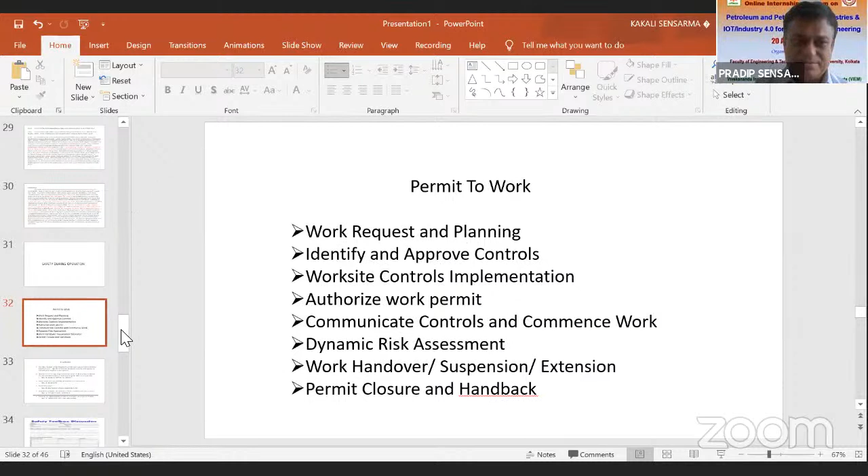Yes, sir. Okay, today's subject, as we said, is HSE in oil and gas. HSE means health, safety, environment in oil and gas.

Before you jump into this health, safety, environment in oil and gas, let me tell you something. This HSE is not a subject by itself. Everything in HSE basically stems out from common sense, backed by your technical knowledge or any knowledge. Common sense backed by knowledge, and you can be an HSE master. You have to apply your common sense, and it can be backed by your technical knowledge. Knowledge is also very important. So it's nothing but common sense.

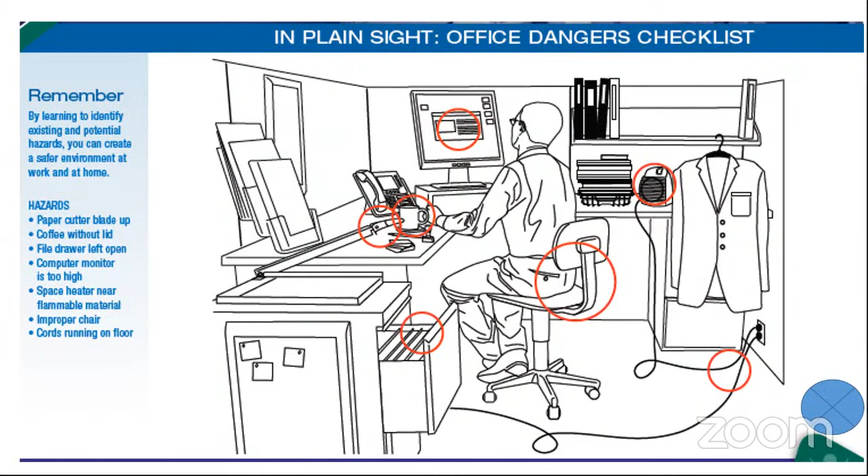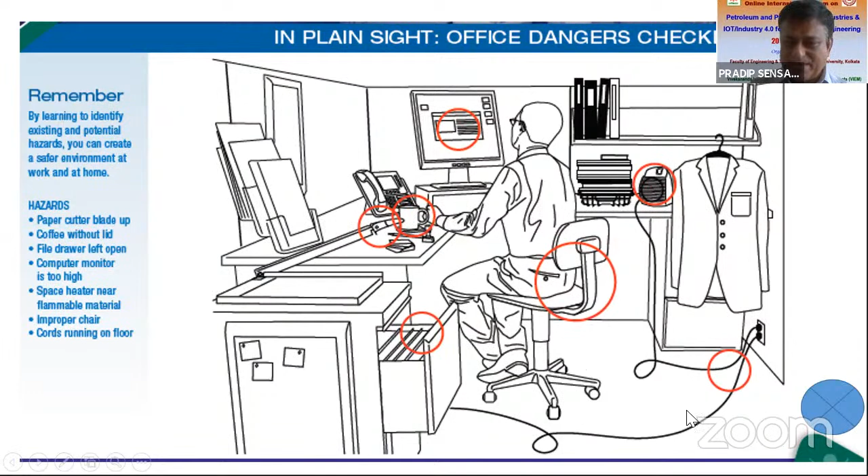Yes sir, if it is hung improperly, then it will be risky. Yeah, if you put your hands - that's why they are put outside your reach. But even if you do not put your hand, there may be some problems coming out of the fans. Just a short video I can show you.

Can you see? Yes, sir.

Providential escape, isn't it? Yes sir. So these fans can come out of it, okay?

And by the way, whatever I'm showing you, it's all available in the open, YouTube or anywhere. You can go, you'll find all these things. And if you look for these fan accidents, there is not one, there are many. These kinds of things can happen with ceiling fans, okay? So there are so many things that go into the design and the installation of the fan also.

So the design of the fan should be such that it can take its load. And during installation also, you have to take care of so many things. A very simple miss, maybe that lock nut - there is a pin there, and that is a very common miss sometimes. They don't put the pin correctly, just put it and don't bend it. So this can create this kind of incidents and accidents. So even if you're at home, you should take care of these things - that whenever you are installing the fans or somebody else is installing the fan, you must take care that they're installing it properly so that this kind of accidents cannot happen.

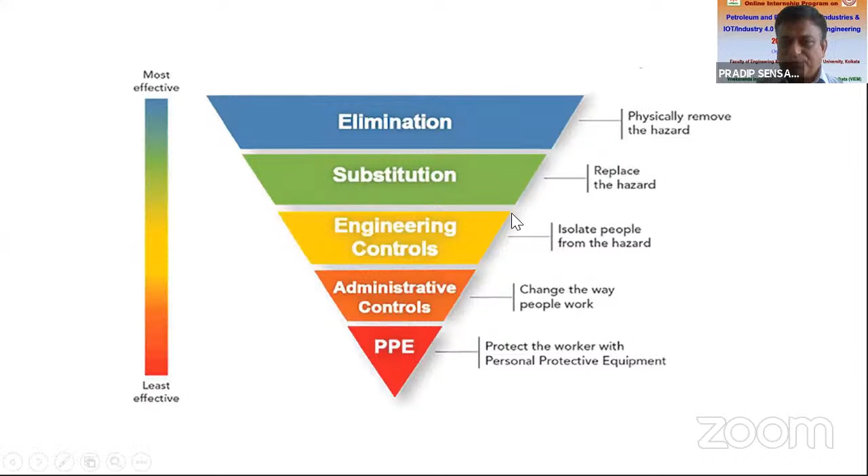Now what I'll do is go through a small part of an oil and gas plant and show how we design it and put safety into it. When you talk about safety, there are two major categories: process safety, which is within the process plants where you take care of process elements in a safe way, and personal safety, or occupational hazards safety.

So when you talk about process safety, first this during the design stage, okay? This is a small plant. I will just explain how we take care about the process safety, which most of the process engineers will have to take care of.

When we talk about safety, sometimes we tend to think that maybe some safety engineer will come and take care of this. I'm telling you, they will not do anything. It is you - most of you are chemical engineers by profession, so probably some of you will be coming into process engineering, and safety is your cup of tea, not the safety engineers'. Safety engineers will always be in advisory roles.

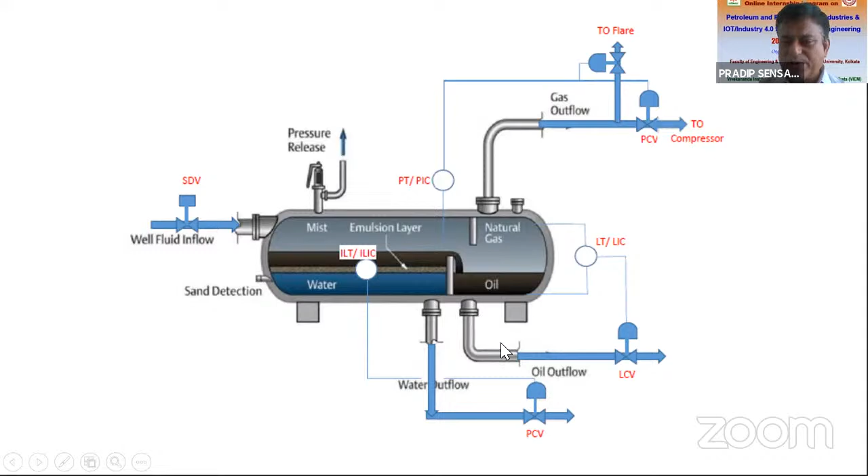Similarly, if the oil level keeps on increasing. Before that, let me check: say the oil level control valve (LCV) goes fully open and is not getting closed for some reason, or there is a passing leak through it and not much input. So this oil level will go low. What will happen? Gas will go into the oil, which can be dangerous depending upon what we have downstream.

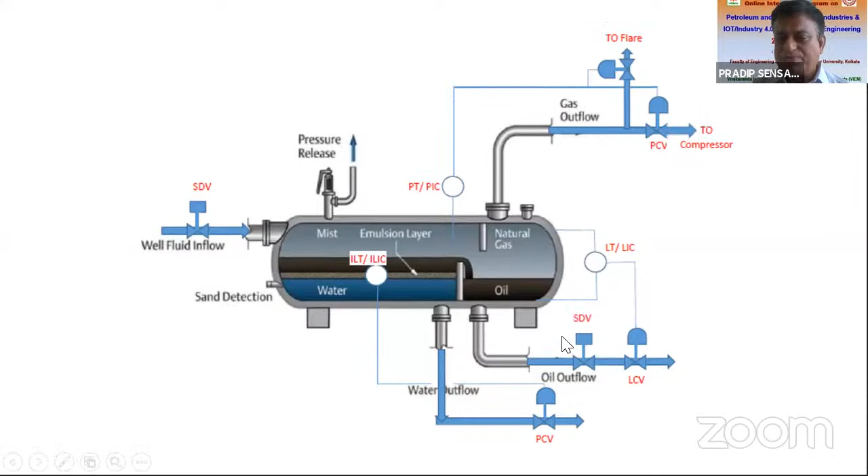This situation we call gas blow-by. So what will you do? You will put a shutdown valve in the oil line, which will operate based on some low level of oil. It will close this shutdown valve, saving this from that side.

Now I have clicked again and another shutdown valve came here. What is that doing? That is handling the other side. If the liquid level keeps on increasing, maybe because the LCV is malfunctioning, or downstream there may be a pump which has stopped, level is increasing. You cannot let it go. Oil will go to the gas line and create a big problem in downstream equipment. So what you do is close this shutdown valve, the first shutdown valve, based on oil level also.

But sometimes this can be so dangerous that oil going to the gas line requires a second shutdown valve also to close. Why? Because this oil level keeps on increasing and goes to the gas line. Now say you have only one shutdown valve, it tries to close. There can always be a failure of a single element. This is a basic principle in process safety design: a single element can fail. So that failure will lead to oil going through the gas line and it can overpressure also in that case. So you might need to put another shutdown valve here.

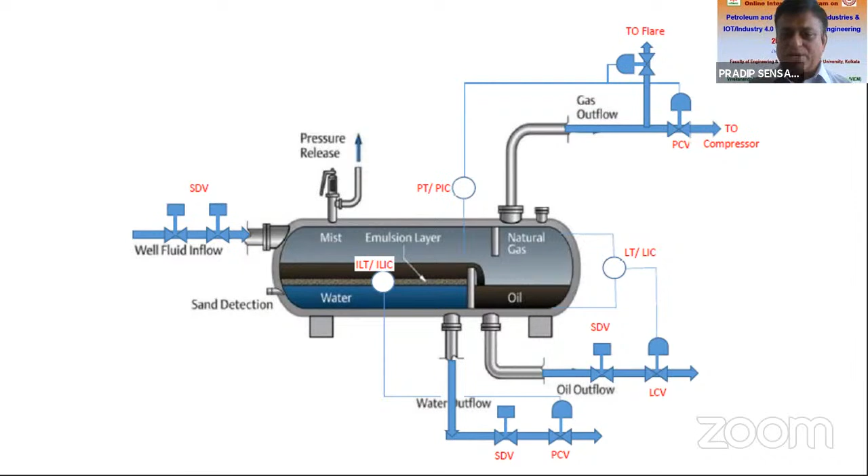Similarly, in the water line also, you will put a shutdown valve to take care of the low level in the water. So one by one, you are going to add these process safety requirements in the separators.

And finally, you come out with this. Now, what is there in the pressure design? Pressure design, you have this gas line, gas control valve is trying to control.

If it goes beyond certain pressure, it will close the inlet shutdown valves. If this shutdown valve fails, what happens? By law or regulation, you have to provide a pressure safety valve. So if this shutdown valve does not close for any reason, this pressure safety valve should be able to evacuate this and save our separator. This pressure safety valve operates at certain pressure, close to design pressure, and it will let go all the gas into the flare. So these are the safety systems inside the separator you put.

Now, once you design this, I have just explained a very small part of a plant. This plant has many pipes, many vessels, sub-separators, scrubbers, knockout drums, compressors, pumps, flow meters, so much piping and so many valves. So you design everything, and there will be a big design with so many drawings generated, which you call P&ID, piping and instrumentation diagram. So at the end of the design, you generate a piping and instrumentation diagram which gives all the details of whatever is in the plant.

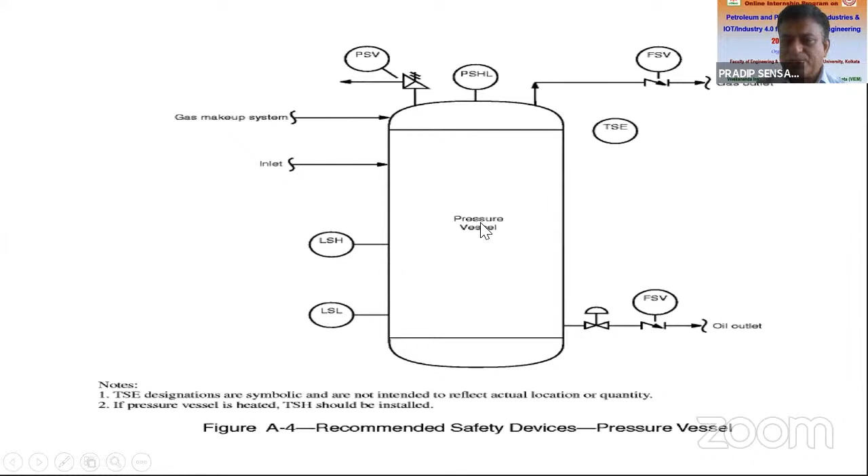I have shown here a pressure vessel like a separator. It says that it has to have a high level safety, a low level safety, some flow safety. The flow safety is check valves - it prevents flow in the opposite direction. It can have a temperature safety if there is a heating element beyond that. Every vessel has to have a pressure safety valve, and it has to have high or low pressure sensing. So these are general guidelines given in the recommended practice, API 14C, that should be your springboard to start designing a process plant.

That same API 14C will give you a safety analysis table, which lists the undesirable event and what could be the possible causes, which you have to look after in the design. And then how you detect those situations on the right side - what are the detectable abnormal conditions, how you detect those situations so that you can take appropriate action. You can install appropriate sensors and take appropriate actions depending upon the sensor readings.

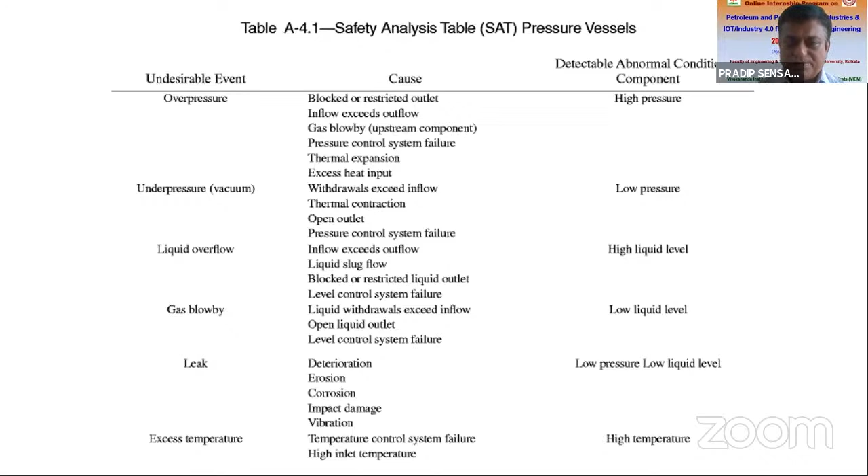It will finally give you a checklist, a safety analysis checklist. This is for a pressure vessel. It has got checklists for all different kinds of equipment. I'll just put a pressure vessel safety analysis checklist here for an example.

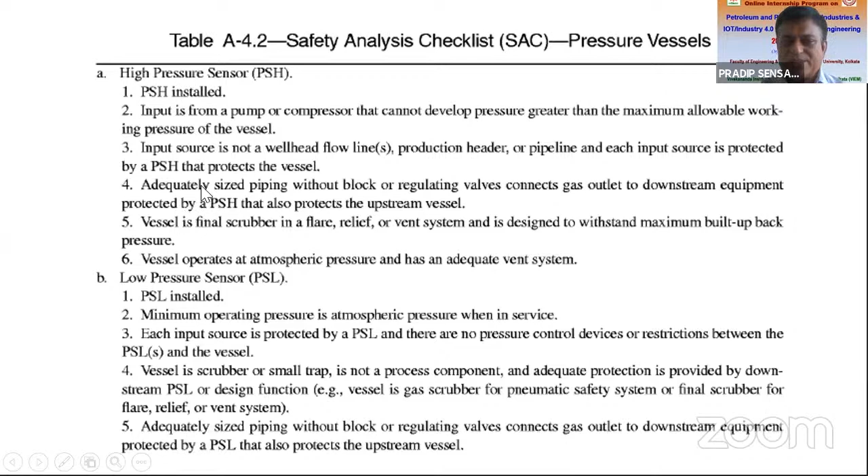The high pressure sensor - how do you take care of a high pressure situation? What are the different things that will be preliminarily acceptable, either a PSH, or there are other things where the protection is there somewhere else, so you don't need a PSH here. So it will tell you what sort of things you can put here and whether you have put it. This safety analysis checklist will allow you to confirm that your design has taken care of high pressure situations, low pressure situations, pressure safety valves, whether required or not, high level sensors, low level sensors, check valves, high temperature sensors. So these things you can get from the safety analysis checklist to check if your design is okay or not.

Now you have designed the plant with API 14C as your weapon. You have designed the plant, but this is the very first preliminary design. Now it has to go through a detailed analysis, and the most detailed analysis in a process plant is done through a HAZOP study. It's called hazards and operability study.

The full phases, you develop the full P&ID, piping and instrumentation diagram, which defines every vessel, every equipment, every compressor, pumps, valves, and all sizes are given, all material is given. Okay, and then...

Taking this whole set of P&IDs, a study is done which is called hazards and operability study. The study simply asks the questions: if there is a high pressure in a particular section of the plant, what are the causes of the high pressure? What are the consequences of the high pressure? What are the risks from this? And then what are the protections which you have already put in the design, whether they are sufficient, or do you think there are some more protections which need to be done.

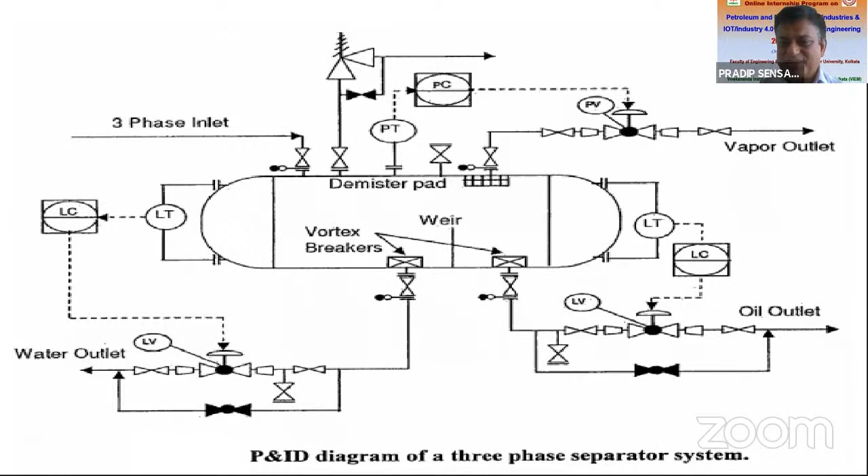And that whole set of P&IDs - sometimes in a process plant you can have probably 150, 200 P&IDs to define a section of the process plant. And you divide that whole section into different logical sections. I'll not go into detail on what this logic is, how these logical sections are defined - it will be too detailed.

And then you apply certain guide words as HAZOP. The guide words could be high level, low level. For a separator, for example, high level deviation means the separator has an intended level at which you will be operating, but now high level has occurred. So, high level - what could be the causes of the high level? What are the consequences of the high level? What are the safeguards you have already put?

And then it will do a risk ranking also in the HAZOP. The risk ranking is called risk analysis, risk assessment. It will assess a probability of this high level happening and the consequences - what can happen due to this high level. It will also assess the severity of those consequences.

Now, I don't know if you are already accustomed to this risk assessment. Let me just open a risk assessment matrix here. So what happens if there is a high level? What is the probability? These are the qualitative analyses you do - these are the probability matrix.

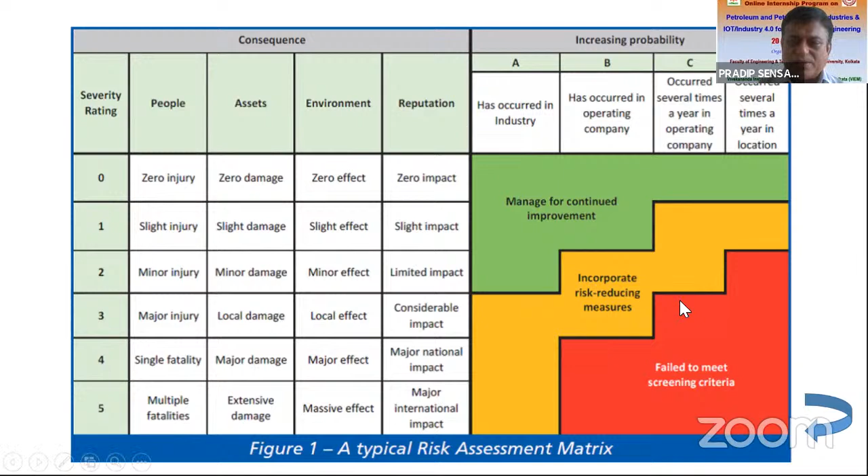So this way, in the HAZOP, you analyze each and every situation and do the risk ranking. And then check what are the safeguards, and qualitatively you analyze whether these safeguards are okay or you need other safeguards.

So this is the way you do HAZOP. This is also a safety study. HAZOP is a safety study. We call it process hazards analysis. You apply these guide words and do this for high level, low level, high pressure, low pressure. For every possible parameter, you put the deviations and do this kind of analysis. It will tell you whether you have taken care of this hazard sufficiently or you need further actions to be taken, which will be stated in the recommendations column.

Now once you go out of this HAZOP, whatever comes out of the recommendations, you put in the design. There may be some changes required in the design. So you do that design, and finally you update your P&ID. Now this is HAZOP and it is supposed to be safe.

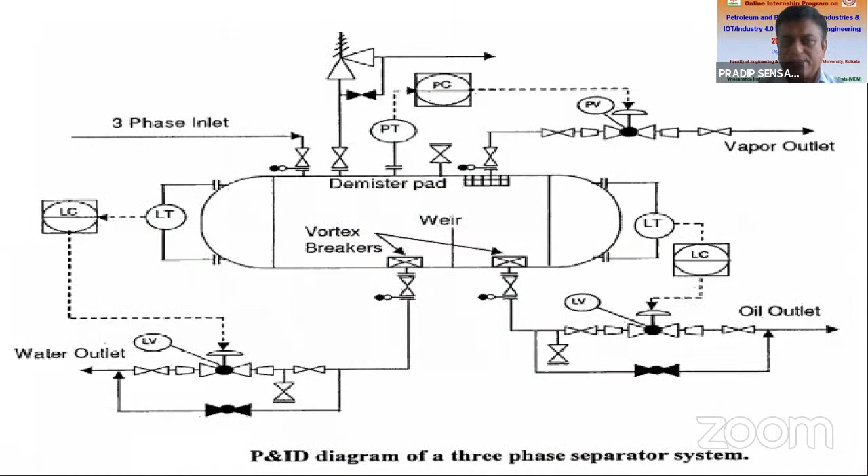Now next, you have put so many controls like this. Shutdown valves getting closed on a pressure transmitter, or this shutdown valve getting closed on a level transmitter. These are all done by instruments, so they're called instrumented protection systems. These instrumented protection systems have so many elements: the transmitters, the controllers, transducers, and then the final element, which is the valve that will close or open. So this instrumented protection system analysis is done through analysis which is called SIL, safety integrity level of these instruments.

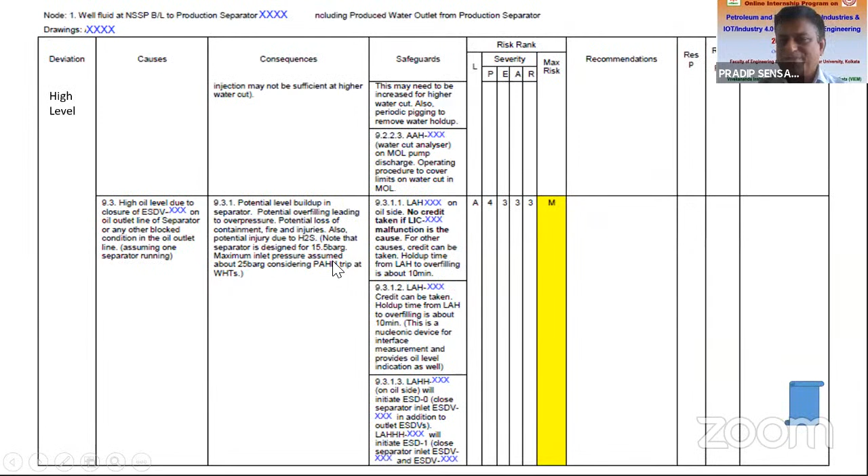So this HAZOP is always followed by a safety integrity level assessment. Now this is too detailed. Too detailed means each and every safety instrumented function, like a level high switch closing a level shutdown valve on the oil line, this is a safety instrumented function. Each and every safety instrumented function is analyzed to check what is the requirement of integrity level of that particular function and what you have already.

And for this instrumented function, a particular factor is defined, which is called probability of failure on demand, defined by the safety integrity level analysis. This will tell you how robust you should design that instrumented function. So the robustness is decided by this SIL level, that you need this much integrity level of that safety instrumented function.

I'll not discuss in very detail because this will be too detailed an analysis. Ultimately you arrive at a level of safety integrity of that particular function which is required. There are generally 4 levels of SIL assigned to this instrumented function: SIL 1, 2, 3, and 4. Normally in oil and gas industry, you don't go beyond SIL 3. Even SIL 3 is complicated. Beyond SIL 3 is much more complicated. Probably only in nuclear industry you have SIL 4. Oil and gas industry, you will not have SIL 4.

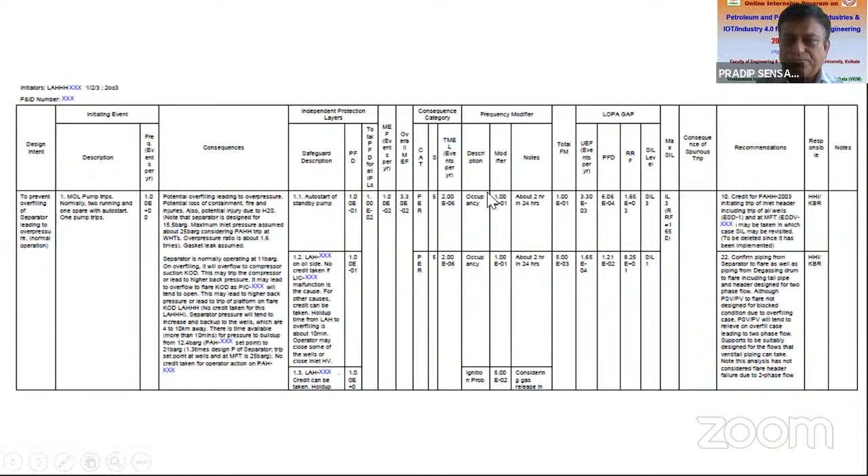Now, this is only process safety, as a process engineer you'll do. But there are many other process HSE works, project HSE works done, many others. I'll tell you what are the kind of project HSE deliverables, meaning what sort of documents and what sort of studies are required in project HSE.

Now, what is the principle? Principle of designing a safe system. Your basic idea is to prevent any accidents. Prevent any accidents means prevent any oil and gas escape to the environment, prevent any fire, prevent any blast, blowout, or whatever. Your basic idea is to prevent accidents.

Now this is a bow tie. You know bow tie, some of you must be wearing one. Now, accident is in the middle. Accident can happen due to some causes, and the causes are on the left. There could be many different causes for the accidents. So we pick up a top event, any event like gas leakage, explosion, some vessel damage, something, and we analyze what could be the causes which will lead to these accidents.

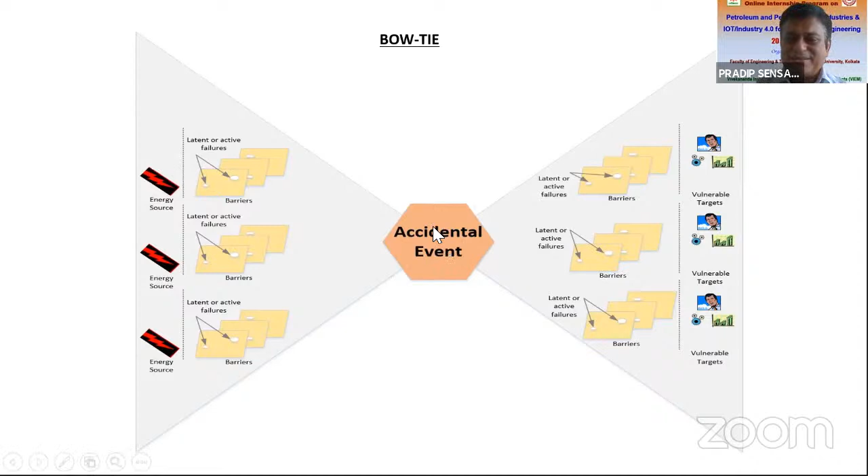And if that accident happens, what are the consequences? Consequences are on the right side. It can harm people, harm assets, harm environment, or harm reputation. So there will be many causes causing an accident, and due to this accident so many different consequences can happen. This looks like a bow tie.

Now, the principle of safety is first, all your efforts should be on the left side first. You should try all out to prevent this accident happening. Or am I correct? Or do you think on the other side you should focus more first? That is, let the accident happen and we will take care by putting something here so that it doesn't harm people, environment, and plants.

Anyone can come back - which side should we focus first, left or right? So left one, sir. We have to prevent the causes first. Okay, so you agree that we should focus on the left side. So first, all our efforts should be on the left side. There will be so many different causes. And how do we prevent those causes from reaching the accident? By putting barriers, one after the other, in those paths.

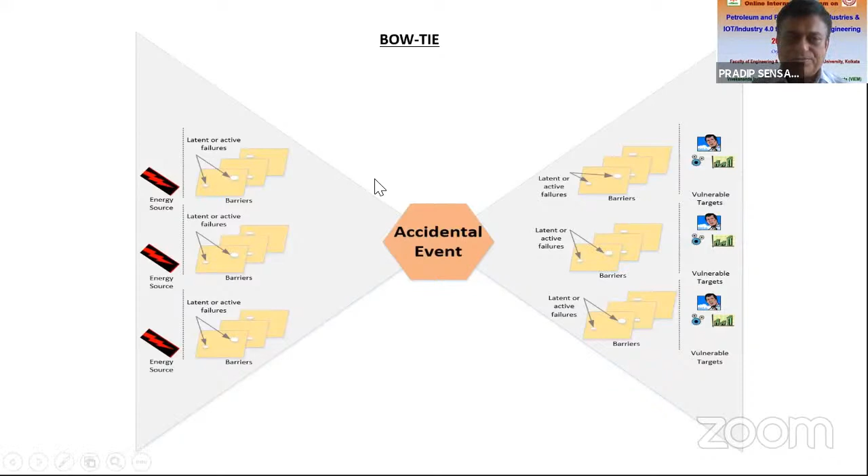We call it a bow tie diagram. Let me show an example. This is loss of containment, of oil in a turret. It shows different kinds of failure which can happen. Mechanical failure can happen, corrosion can happen, erosion, process conditions exceeding design limits, inadequate overrides or inhibits, vibration, mechanical impact, human error, severe weather. These are all different causes which can lead to these accidents.

But now we can think of different barriers between these causes and this accident. For example, for mechanical failure, we can do equipment selection per standard. We should be following standards properly to have proper equipment selection. This is a barrier between mechanical failure and this accident.

Then we'll do a flange management procedure. Normally in mechanical failure, the most common location of failure in a plant is the flange. We'll put a flange management procedure, properly manage flange tightening and all, so that we prevent any leakage and loss of containment. And we'll put people for site monitoring also. Site monitoring means that when you have a loss of containment, in most instances that loss first starts with a very minor leakage, and if you have proper site monitoring you'll catch it then and there before it escalates into this top event.

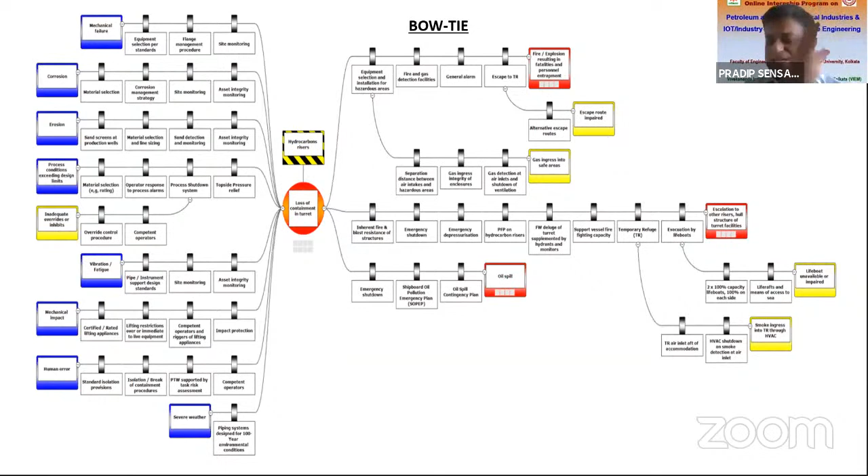Now the temporary refuge can fail. Maybe in the escape route, things are blocking the path, like we saw in that kitchen example. In the escape route, so many things are put, and you may not be able to escape. So an alternative escape route should be there. This barrier is put between escape route impaired and the main barrier so that it can still work.

So this is the way bow tie analysis is done for the whole platform. In a process plant, this bow tie analysis becomes very big and complicated, because each element and sub-element is analyzed, and finally it becomes a very big file. I've just shown one part of it, easily available on the open internet. In an actual plant, this bow tie diagram will be very complicated and very big, with so many different barriers put in place.

Some of these barriers are procedures, some are design, some are monitoring, some are maintenance. So all these barriers are put on the left side as well as the right side. This is the principle on which HSE works.

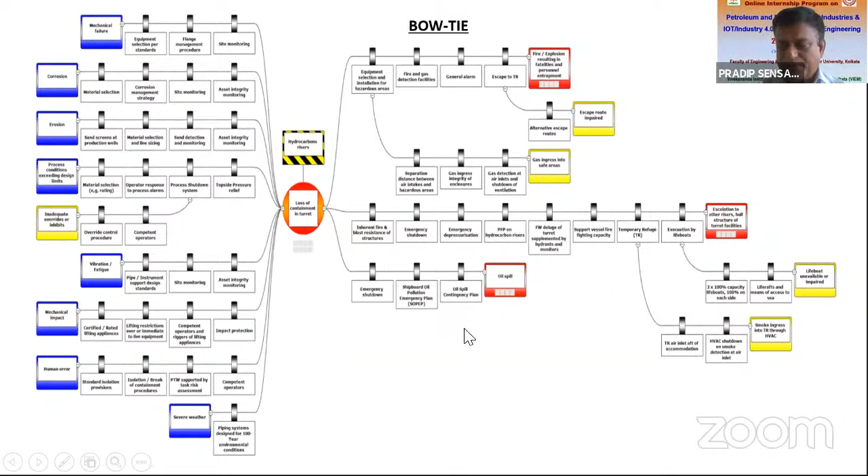Now, as I said in the beginning, there are 5 stages in the process: assess, select, define, execute, and operate. Up to execute, it is the project design. There are different kinds of HSE deliverables, meaning HSE studies and reports done during different stages of the project.

In the assess stage, HSE plan and environmental baseline study are done. Then health safety impact and environment impact assessment is done. This is a very important document to get government approval. Many projects are shelved because of problems with environmental impact. This impact assessment shows what sort of impact there is, and whether government will accept it or not. In every country, this is an important document for moving ahead with any project and getting government approval.

Then the PHSER report is basically the project health, safety, environment review, checking whether we are doing all the required safety studies or not. This is also a mandatory requirement in a project.

In the select stage, we do much more than in assess. HSE philosophies, HSE IA, all those things are revisited. Then risk management documents are done: HSE plan, risk register. There is a hazards identification study. This is also a big study at the beginning of the project, where we normally identify all major hazards and how we mitigate those hazards.

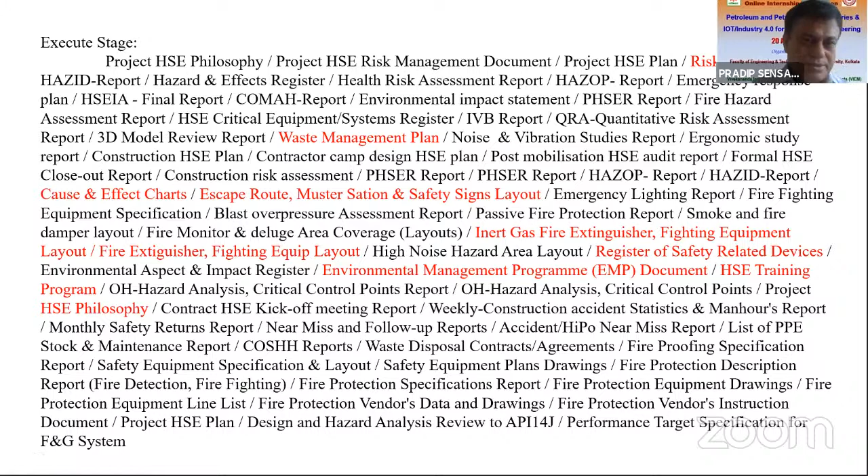Then there is the environment management program which you have to follow. There is HSE training, HSE philosophy which you have to follow during the execute stage. So there are so many different kinds of HSE studies and documents developed during this project stage.

Now come to safety during operation. Am I running out of time? I don't know, what is the time now? 6:40, 6:40, okay.

Now during operation, one of the most important things is permit to work. A plant operating in steady state - oil and gas coming in and going out, compressor running, pumps running - there's no safety problem. The major problem happens when you try to intervene in a process. Maybe you have to take out a pump because it's creating noise, to do some maintenance. So you have to open some flanges, open some glands, and so on.

Maybe some pump gland started leaking, so you have to isolate that pump and do maintenance, open it and fit a new gland, a new seal. So these are kind of interventions. When you do an intervention in a plant, this permit to work is a must in every oil and gas plant. The maintenance team comes and does the intervention, and that has to be controlled very properly, because those are the sources and activities which can lead to incidents and accidents if not properly managed.

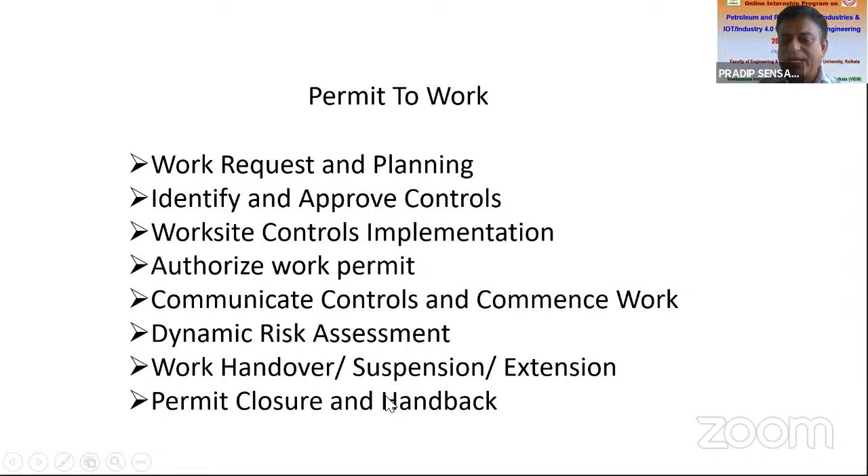After completion, the work can be handed over, or maybe in between it can be suspended, or they have taken a permit for a day but it could not be completed, so it needs to be extended - these extensions are done. At the end of this whole work, the permit is closed and things are handed back to operations. This is the way it is done - these are the stages.

In a permit to work, in general, there are two parties. One party is the performing party. Another party is the people who are allowing this job to be performed, which is the operating party. So performing authority and operating authority - they sign these permits at different stages and issue these permits. This permit to work is one of the basic requirements in any process plant during the operating stage.

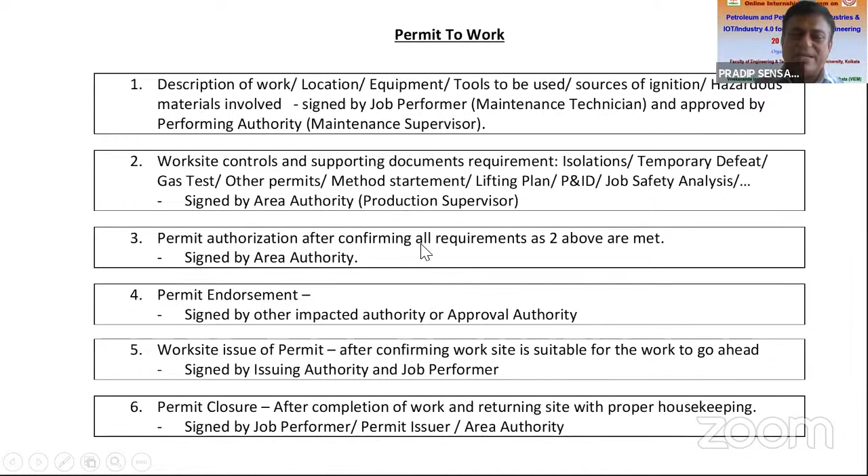Toolbox talk is a detailed thing within the permit to work.

Okay, I think I have some 10 minutes more. Yes, Pradip, okay, actually Mirza has joined already. So naturally when you will feel comfortable and almost on the verge of completion, then - yeah, maybe another 10 minutes, because I just wanted to show the importance of permit to work.

Due to a failure of permit to work, one of the major accidents in the world happened. It was quite some years back - the Piper Alpha accident. I think you must have heard of it, but if not, here is a 3-minute video. In 1988, 120 miles northeast of Scotland, the Piper Alpha oil rig...

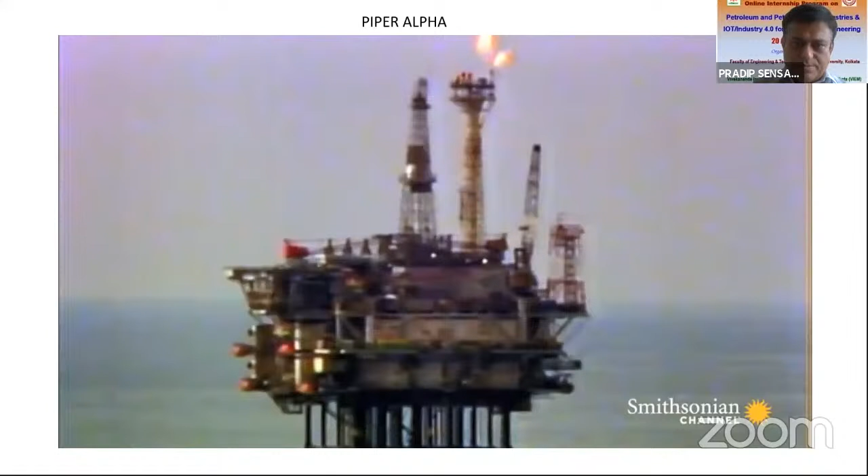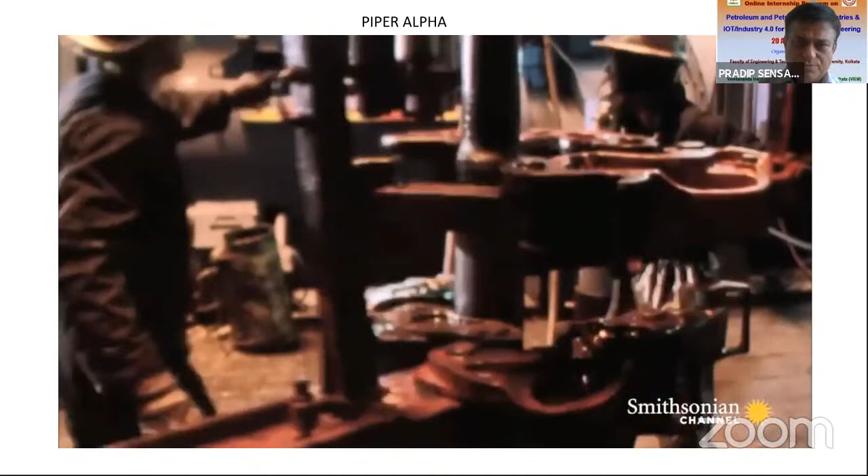At 14,000 tons and 2.5 times the height of the Statue of Liberty, it is one of the largest rigs in the world. Piper Alpha was the world's most successful oil rig. That means in a single day, Piper Alpha produced more barrels of oil than any other oil rig or platform in the world. A crew of 226 rotate shifts to keep the oil and gas flowing.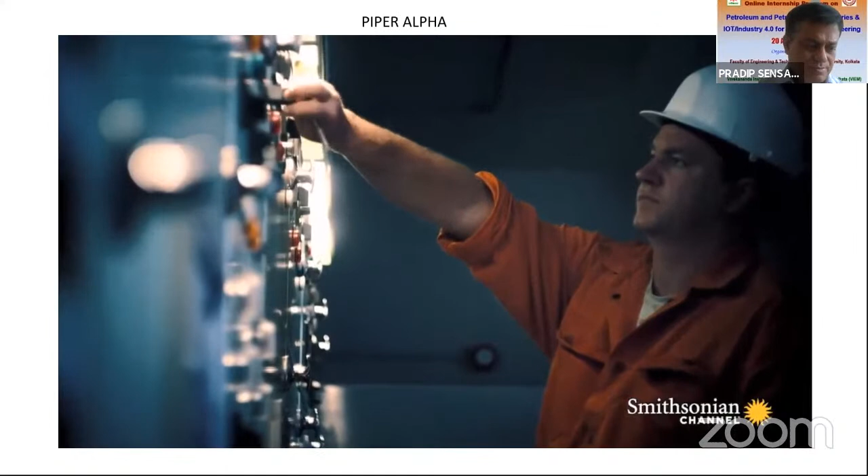Geoff Bollands is the chief control room operator that evening. At 9:45 p.m., Jeff suddenly hears an alarm, indicating a problem with one of the rig's condensate pumps. The condensate injection pumps tripped more than any of the equipment. No panic. We knew we needed to get it back on because it was going to start affecting production.

That evening, Pump A is offline for maintenance, leaving just Pump B working - the same pump that's now been shut down by the alarm's trip system. The condensate pumps were an integral part of the production facility. You couldn't have them both offline for any great length of time without shutting down everything.

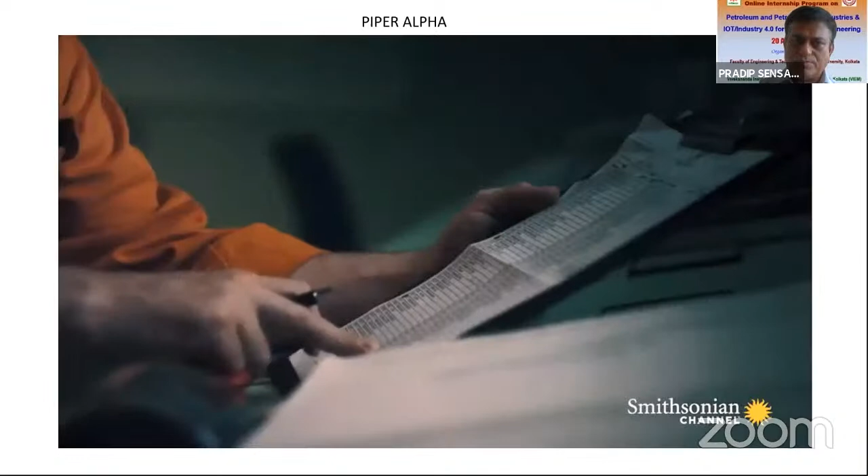To avoid a full shutdown, the decision is made to halt maintenance on Pump A and bring it back online. But what nobody knows is that Pump A has a fatal flaw. During maintenance, its safety valve has been removed, meaning there is nothing to stop thousands of cubic feet of gas escaping into the atmosphere. The faulty pump is switched back on.

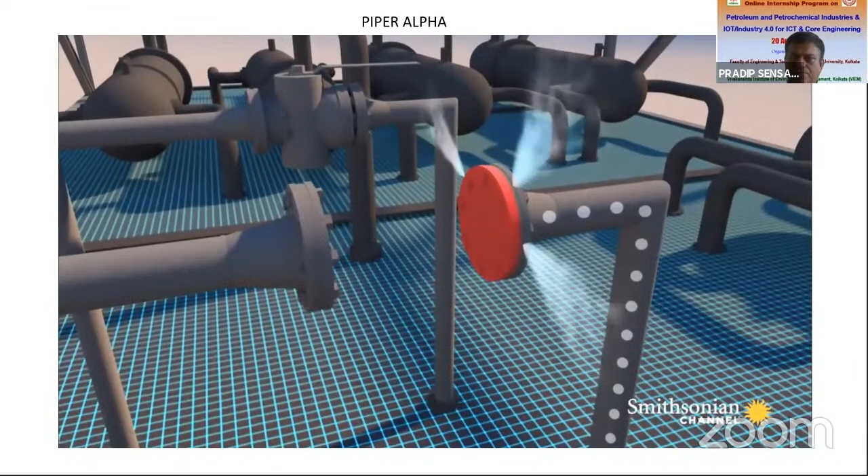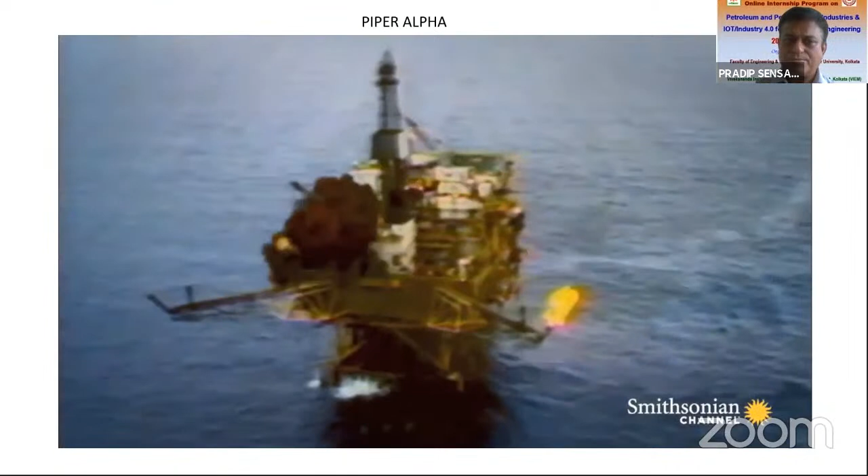Then at 9:55 p.m., disaster. A spark suddenly ignites the escaping gas, and an explosion rips through the rig. Confronted by 700-degree flames, most of the 226-strong crew are now either dead or severely injured.

The nearest analogy is the cross between Titanic and Towering Inferno. All hell was breaking loose on that. It was just a scene from hell - it's the only way you could describe it. A scene of absolute carnage and hell. Flames, explosions, debris. Things were escalating so fast at that point that it was almost impossible to take things in.

By 10 to midnight, less than 2 hours after the initial blast, the Piper Alpha is on the verge of collapse. Finally, the rig's legs start to give way, and the Piper Alpha starts to slide into the sea. The accommodation module and the rest of the platform just started drifting apart. Three-quarters of the platform very slowly fell into the North Sea. That's my worst memory, knowing there were people still on it. It would have gone to the bottom of the sea.

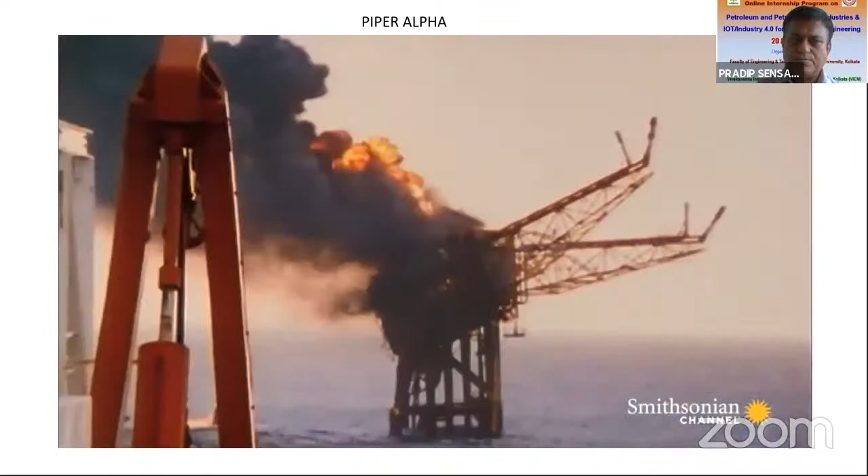A total of 167 men lost their lives that night. Just 61 survived.

This was a defining moment in the oil and gas industry. This particular incident has changed the face of the oil and gas industry. After Piper Alpha, all different kinds of regulations have come worldwide to manage things safely.

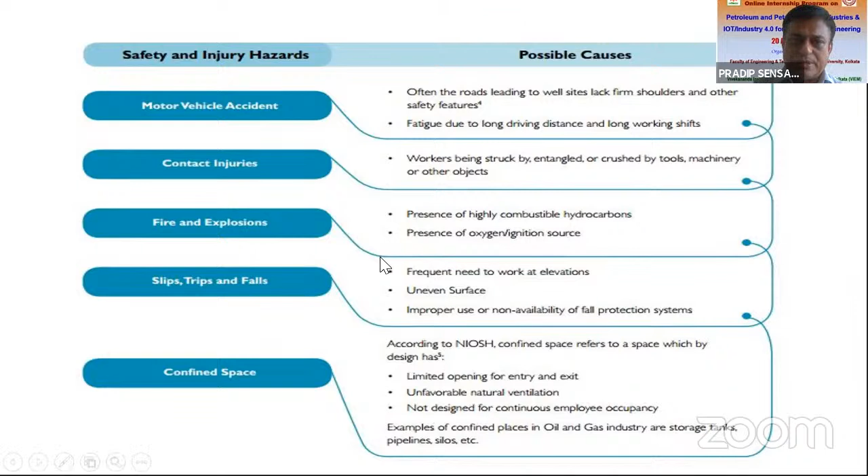There could be around 600 incidents with no visible injury, which can lead to 30 property damage accidents, which can lead to 10 minor injuries, and that can lead to 1 serious or disabling injury. So to eliminate these top events, we have to attack the bottom events. If we can take care and plug the holes by observing incidents or safety observations at the bottom of the triangle, then we can prevent these top events. That is the philosophy being adopted everywhere by all oil and gas companies in the world.

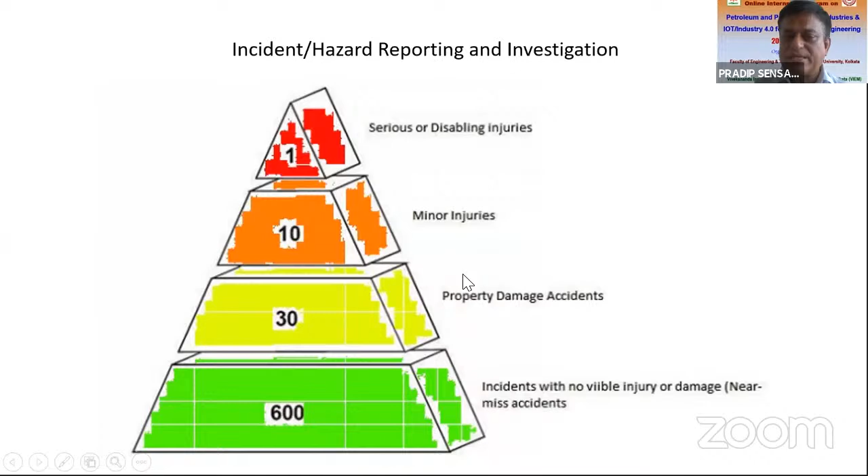We do thorough safety observations in our work. Day to day, everybody contributes in observing safety, whether we are doing things correctly or not. All the observations are recorded and actions are taken accordingly. If we find somebody doing something wrong, we don't penalize, we coach them, so that they can correct themselves. And of course, if they do the same mistake willingly, there is consequence management. But the very first line of defense is coaching people, so that we move towards a safer environment. That is done through this incident and safety observation process.

Lifting is one of the areas where a lot of accidents happen, like crane lifting and all. People come in the way, and there's a moving load. So we do some sort of campaigning to coach people on lifting safeties they have to take care of. Each month we take a particular side of the safety requirements, coach people, and do some competitions. This is all during operations. This is the way we try to lift our safety standards.

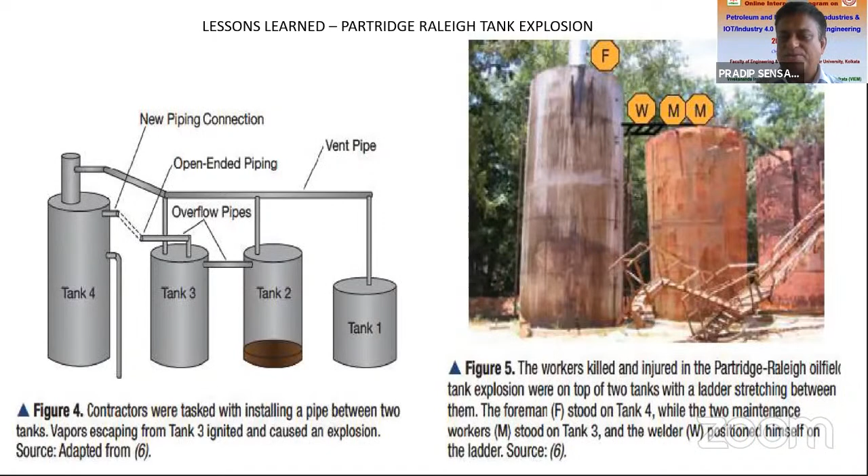There are many lessons learned in the industry. I talked about one, the Piper Alpha. Due to paucity of time, I will not go for the other things, but we learn from safeties. These are all available in the open internet, you can go through that. There are mistakes done, permit to works not followed properly, or actions that were to be taken before any maintenance work were not done, which led to many different kinds of accidents and loss of life. There are plenty of examples available on the internet which you can also go through.

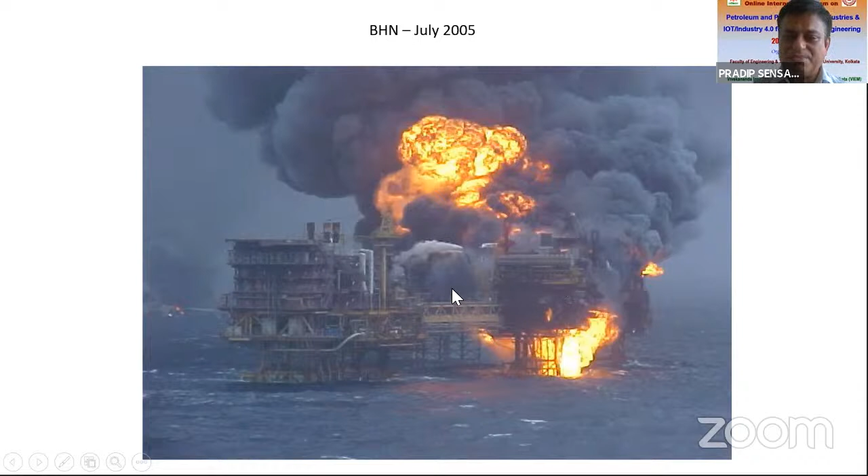This is a famous one, Bombay High North, which caught fire due to an accident caused by mistakes in operations. A vessel collided with the riser, and it caught fire, leading to some 12 or 13 people dead, and luckily many more escaped, more than 250 people. The platform was lost and was rebuilt after quite a few years. This is a recent accident which happened this year, also in Bombay High.

Okay, thank you very much.

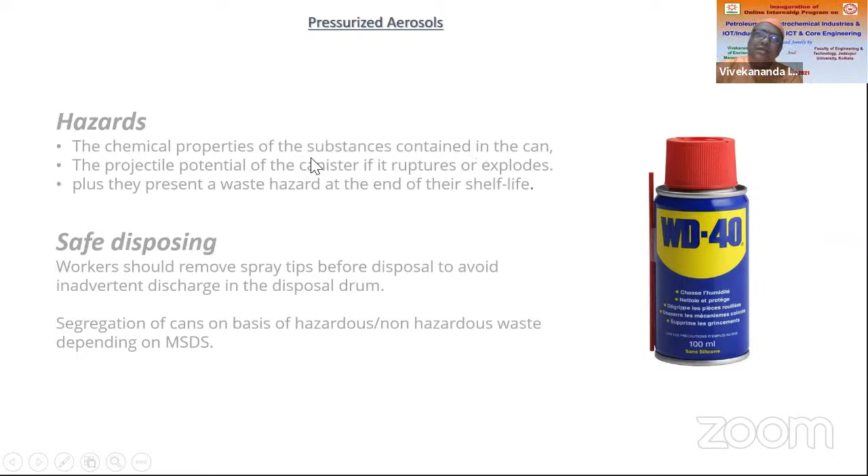Thank you, Pradip, thank you. Actually, after seeing the videos, I don't have the mood to talk because those are such dreadful things. And actually, those are specialists, working professionals, so they should have that adequate knowledge. That is a great thing they are having. That's why my humble salute to you.

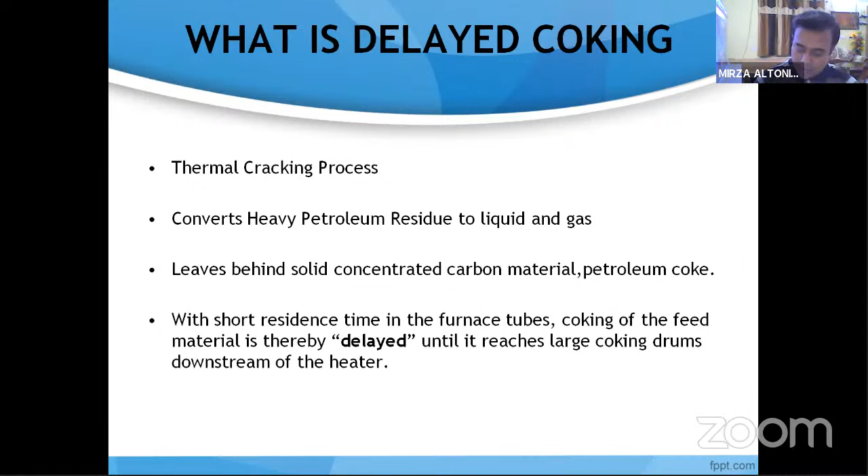Now, as you know, our feed is basically the bottom of the barrel feed, meaning whatever comes from the vacuum distillation unit bottoms is sent to DCU, the delayed coker unit. Our intention is to cater to the demand of middle distillates - that means gas oil, light gas oil, and heavy gas oil.

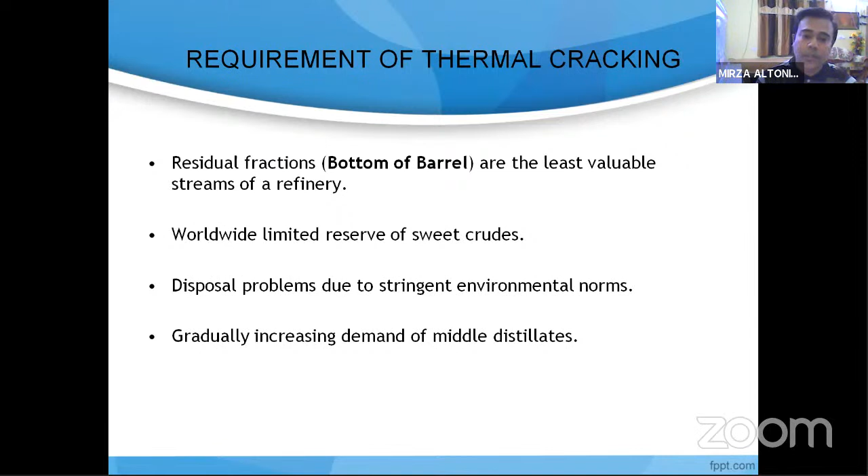As I've said, thermal cracking is a simple and cost-effective process where we don't require a catalyst to control the reaction. It's basically about raising the temperature and initiating the cracking of the vacuum residue. You can go through this.

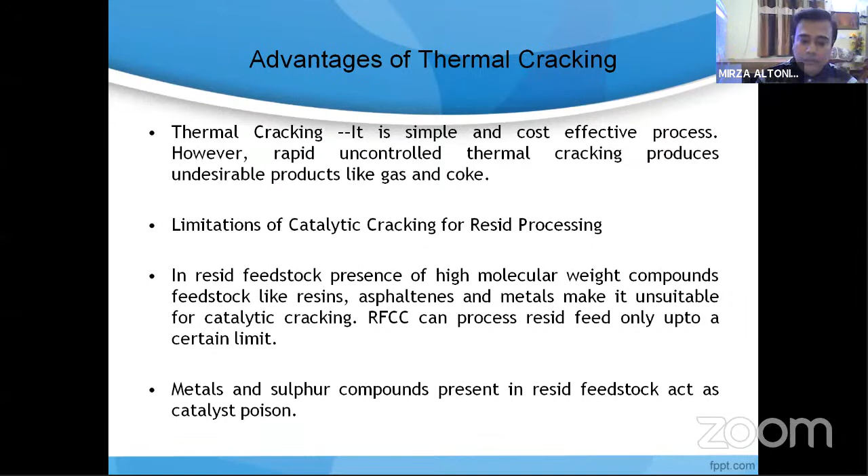As I've already stated, in thermal cracking there are generally two types of reactions. One is the decomposition of larger molecules into smaller molecules. The second is further cracking of those smaller molecules, which gives us the heavier products - that is the coke.

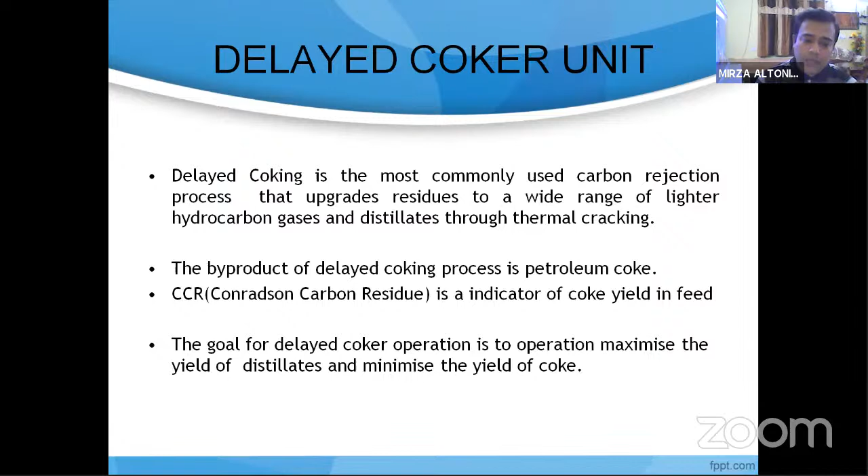The byproduct, as I've already said, is the petroleum coke. CCR, whenever we are taking feed in DCU, we generally take a note of the CCR. CCR is basically Conradson Carbon Residue. It gives an indication of the coke yield in the feed. Whatever feed we are getting, our unit throughput is say 200 tons per hour of vacuum residue. So our yield will be around 25 to 30%, based on the CCR. Our CCR may be 21, 22, or it can go up to 30%. Our ultimate goal is to increase the distillates and minimize the coke.

Sludge is generally only processed by DCU. Sludge is very difficult to get rid of in refineries. Sludge can be processed in DCU, and it is one of the most efficient and cost-saving things that is done in DCU.

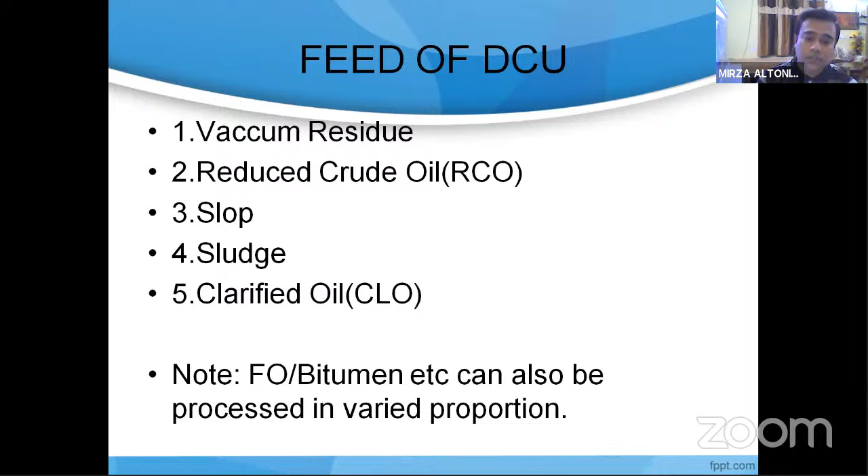And now, what are the products? The main products from DCU are like lighter gases, fuel gas, LPG. We have stabilized naphtha, light coker gas oil, heavy coker gas oil, and our byproduct, that is coke.

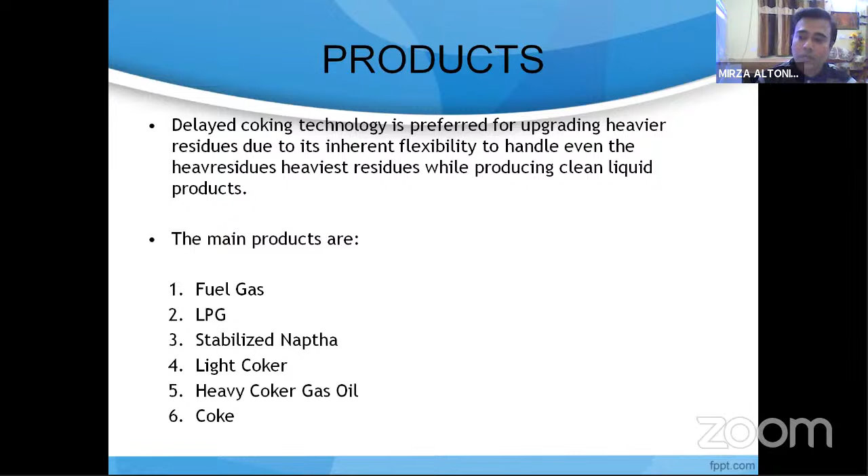That is the outlet of the furnace, we generally term it as coil outlet temperature. That we maintain around about 500 degrees Celsius, and we vary it as per the coke yield and other parameters. From the coker furnace, from the outlet of the coker furnace, the VR is sent to the coke drums. As I have said, one of the coke drums will be in operating mode, or the inline drum, where we will be feeding the VR continuously, and the other coke drum will be in the cooling cycle, cooling cutting cycle.

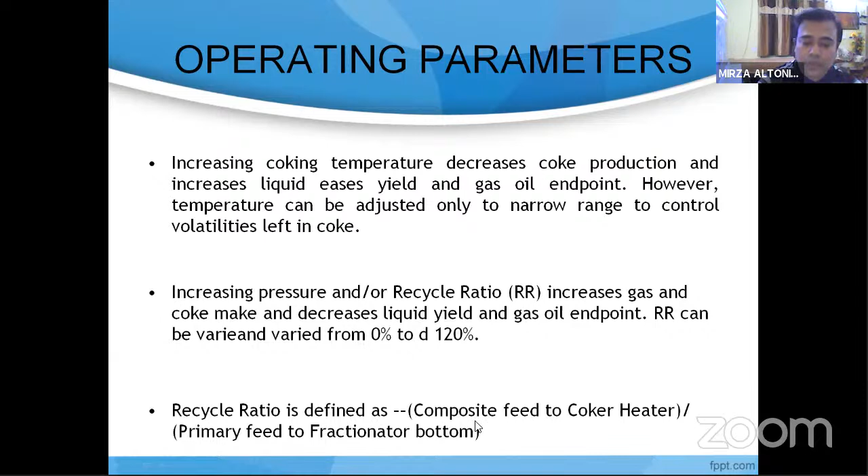Again, if we increase the pressure and the recycle ratio, it also increases gas and coke make. As I've said, recycle ratio is defined as the composite feed to the coker heater divided by the primary feed to the fractionator bottom. That is the recycle ratio.

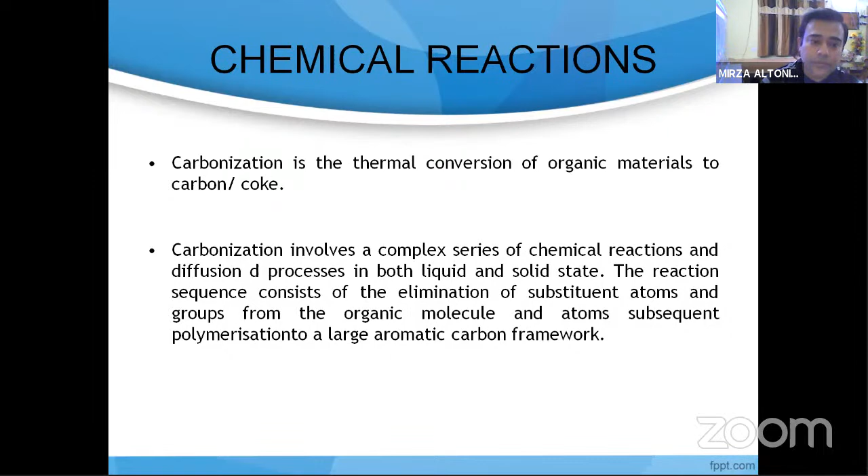This is just a chemical reaction, I would go through it briefly. It's basically the thermal conversion of organic materials to carbon, coke. This is again the chemistry, you can go through it. You can have the PPT after this presentation and go through it.

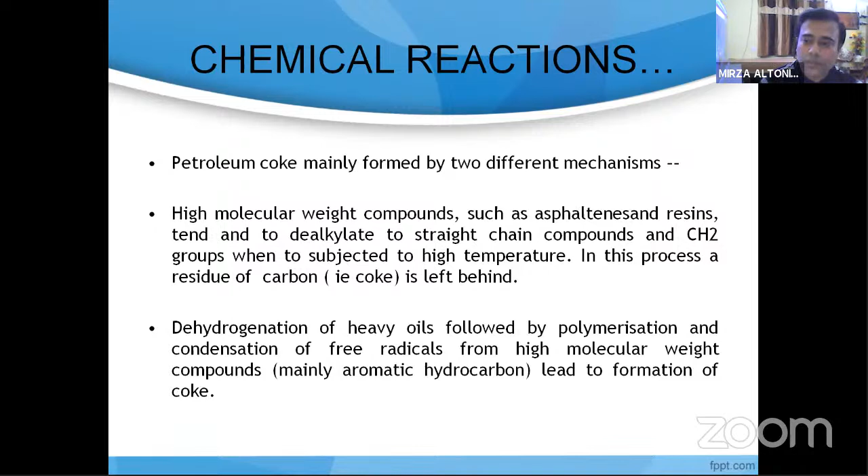There is another section, the blowdown section. Generally what happens in the offline drum during this - as I've already said, there is a 24-hour cycle for converting that offline drum ready for cutting of coke. So there are some processes there where we do steaming and cooling. These are all the processes which take place for making this drum ready for cutting.

During that process, when you are using steam, whatever oil or VCM content is inside the coke drum, inside the coke, that is all stripped to this blowdown section. The reason for having this blowdown section is for environmental reasons, because this VCM, whatever oil and VCM is there, we cannot simply flare it or vent it to atmosphere. So this blowdown section is there to take care of that, so that there is no environmental atmospheric emission.

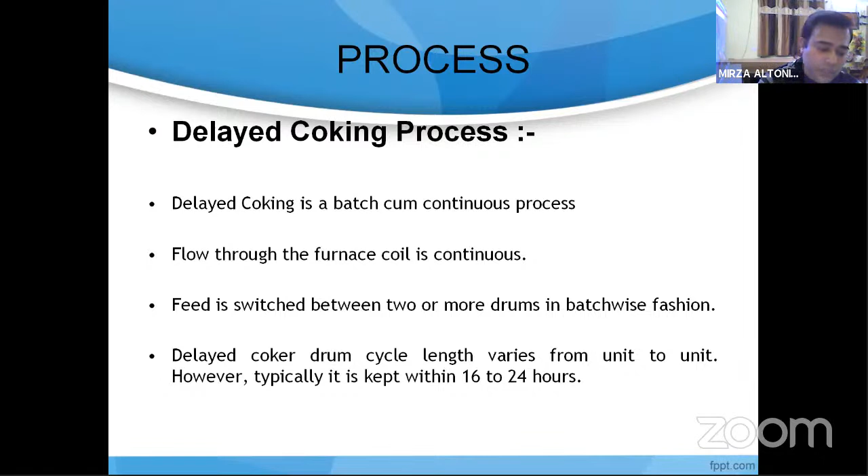Now, as I was saying earlier, in the delayed coker unit we go by the cycle time. This cycle time basically indicates the time during which one coke drum is in line and the other coke drum is in offline mode, during which certain steps take place to make that drum ready for cutting, and after cutting we prepare it for coming back in line with the process.

There is some write-up available, you can go through it.

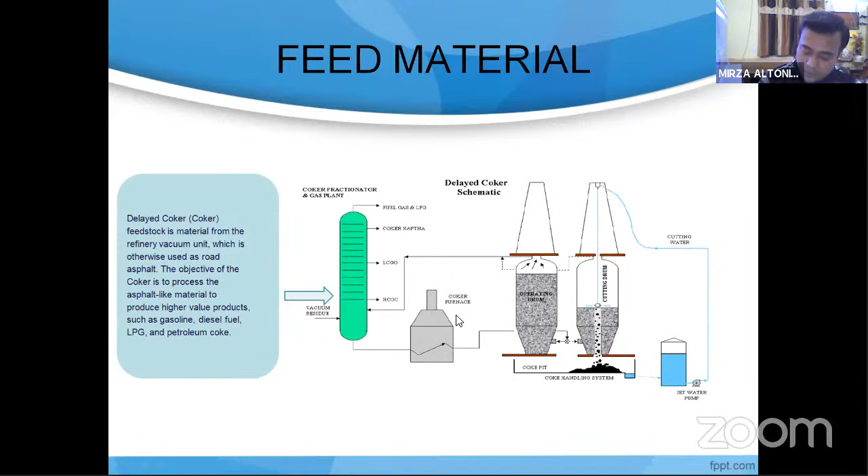Just as I've said, this vacuum residue is coming to the main fractionator, and from this we produce high-value products such as gasoline, diesel, fuel, LPG, and petroleum coke. FG and LPG are recovered, and naphtha is also fractionated here. LCGO and HCGO are two products which are generally sent — LCGO is sent to the diesel pool or to the hydrotreating unit for further treatment. HCGO is generally sent to the FCC, or it can be sent to the hydrotreating unit as per refinery configuration.

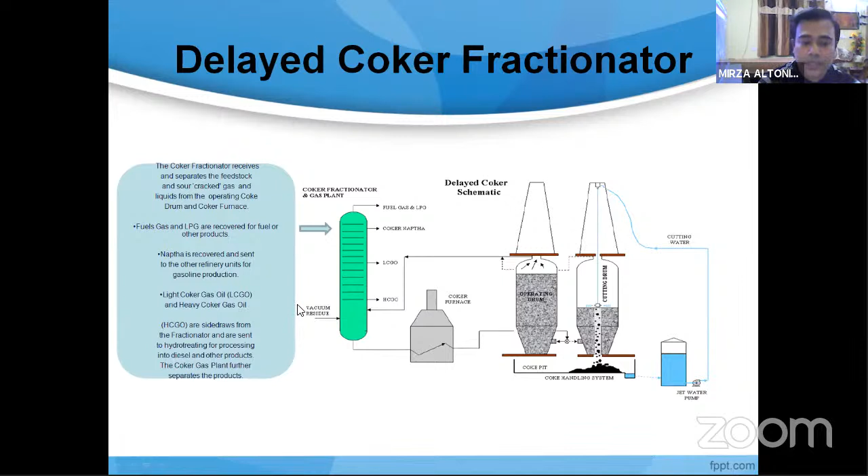This is a coker furnace, basically the heart of the delayed coker unit. The coker operation is the most critical thing to watch out for in DCU. As I've said, there's always a coil outlet temperature band through which we have to operate — it can be say 495 to 505 degrees Celsius, or as per the feed and licensor specifications. As I said earlier, this steam is injected to minimize cracking until it reaches the coke drum — that is the velocity condensate. What it does is basically turbulize the fluid and increase the mass velocity.

There is a coking tendency inside the coils of the furnace, so this is minimized. If there is a variation in the velocity of condensate, suppose it decreases due to pump issues or instrumentation problems, there is a provision for shutting down the unit and injecting emergency high pressure steam inside the coils to remove whatever coke is there. Otherwise, at that temperature, around 500 degrees Celsius, all the vacuum residue inside the coils will coke up and cause big trouble for the unit.

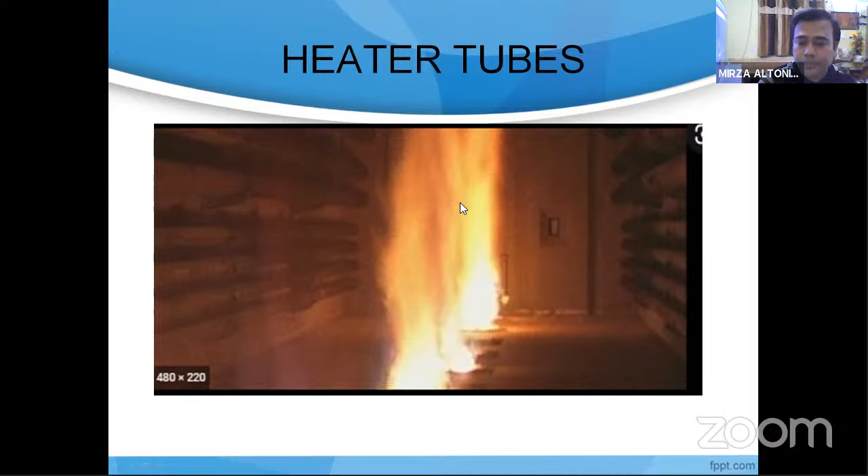This is again what I mentioned earlier. In the offline drum, what we do is basically steaming. After it is taken out of line, first we do the steaming, then cooling is done. After cooling, once the drum is cooled, we open the unheading devices. By unheading devices, we mean at the top and bottom of the coke drum we have got two automated unheading devices - I'll show the picture later. So for cutting, we need to open those unheading devices at the top and bottom.

15 or 20 years ago, we did not have the provision of automated unheading devices. But nowadays we have these automated unheading devices where there is very little manual operation. From a safe height, a safe location, we can open these unheading devices through PLC driven logics to safeguard against any untoward reaction.

What wrong can happen while opening these unheading devices, I'll show a bit later. It was a big safety hazard, and in fact there were some accidents which took place due to wrong opening of the unheading devices. I'll tell you a bit later. Let us go to the next slide.

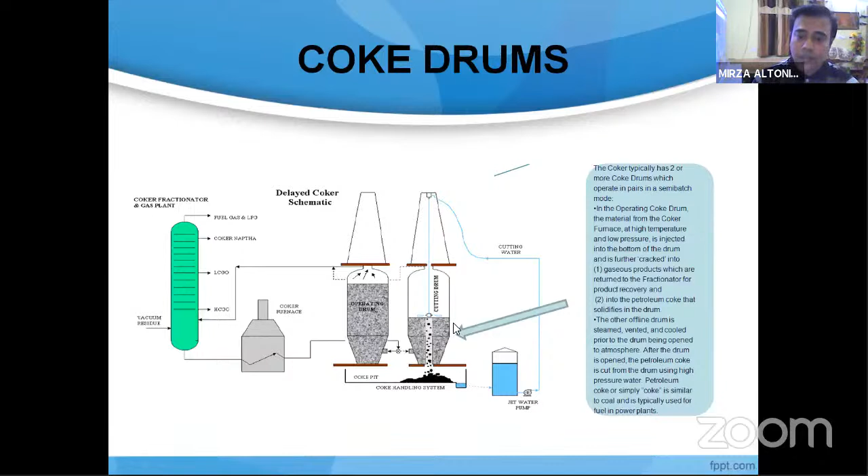Okay, so these are the coke drums. Like I said, coke drums can be in pairs - either 2 drums or 4 drums.

This portion is the Kelly portion. Now, what do you mean by Kelly? Kelly basically comprises a long stem with a cutting tool. The water jet that we use to cut the coke inside the drums - this entire section comprises that cutting tool. There is a long pipe, and at the end of the long pipe we have a cutting tool which controls the pressure, around about 350 kgs, and that helps us in cutting the coke inside the coke drum.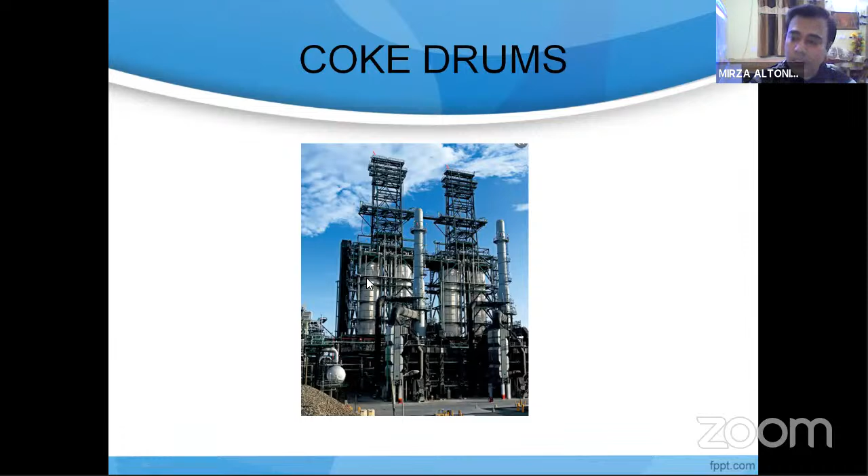This deheading that I mentioned, nowadays it is totally automated. It has brought in a new level of safety in coker units. We had seen incidents of fire and explosion at the top of the coke drums earlier due to wrong operation, but now this hazard point has been addressed. As time went on, refineries understood the importance of these automated unheading devices, and in old refineries also, they are planning to change their system from manual unheading devices to automated unheading devices.

This is the unheading device. Basically, what happens here - this is the bottom of the coke drum. We call it BUD, bottom unheading device. There is a long plate which covers the bottom of the drum. When we need to operate the unheading device, that is when we need to open it, either it is moved by electrical force through motor driven operation, or it can be done by hydraulic pressure. This is a totally automated system, so there is very little chance of an unsafe act by any person.

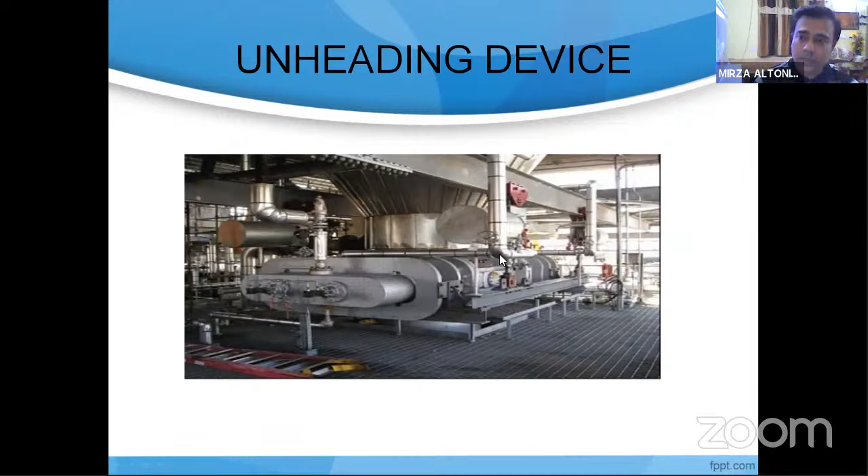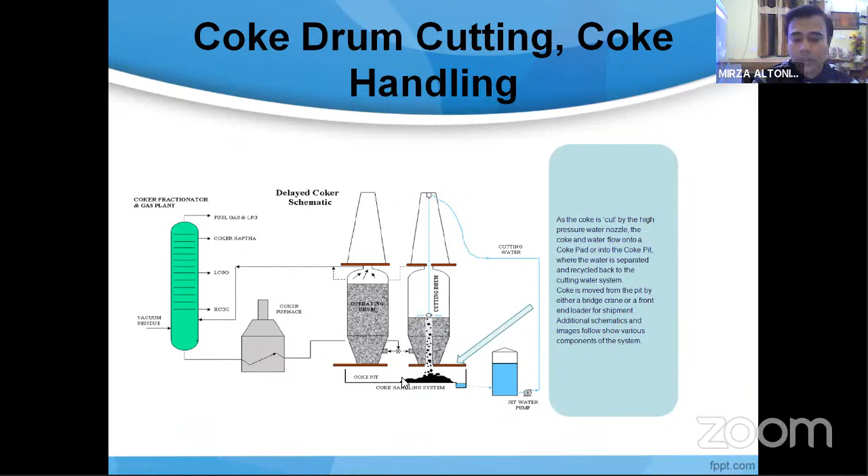Coke drum cutting and handling. They're using high pressure cutting water. We are cutting the coke, and all the coke goes into the coke pit at the bottom of the coke drum.

So just to recapitulate, on the hydrocarbon side, the flow is: initial feed goes to the heat exchangers for preheat, then to the main fractionator column, then to the heater. From the heater outlet, it goes to the coke drum. The vapors from the coke drum come back to the fractionator where distillation takes place, and the products are sent to the gas con section.

From the water side, that is the coke cutting system, we have the coke cutting tank where we store the cutting water. From there, using the cutting water pump, we do the cutting operation in the coke drum. Whatever water goes into the coke drum, from the bottom of the coke drum it goes to the coke pit, and again it is recycled back to the coke cutting tank using a maze, where we have a pump which pumps the water back to the coke cutting tank.

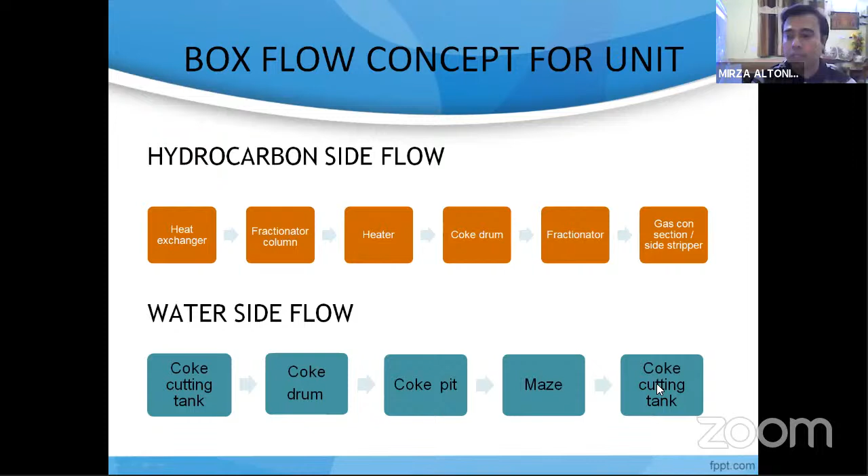These are the main three sections: fractionator section, coke drum section, and gas con section. Fractionator section contains the main fractionator. Coke drum section contains the heater, coke drum, and blowdown section. Gas con contains our compressor, stripper, absorber, sponge absorber, amine scrubber, debutanizer from where we get the LPG, and our naphtha splitter. From the naphtha splitter we get light naphtha and heavy naphtha, and the LPG amine contactor.

Here we are getting the LPG, the sweet LPG. We have the amine circulation going on in the column, and from there we are removing the H2S, and we are getting the sweet LPG from this column.

So this gas con section is always in operation. The coke drum section is a batch process, and the fractionator section is also in continuous operation.

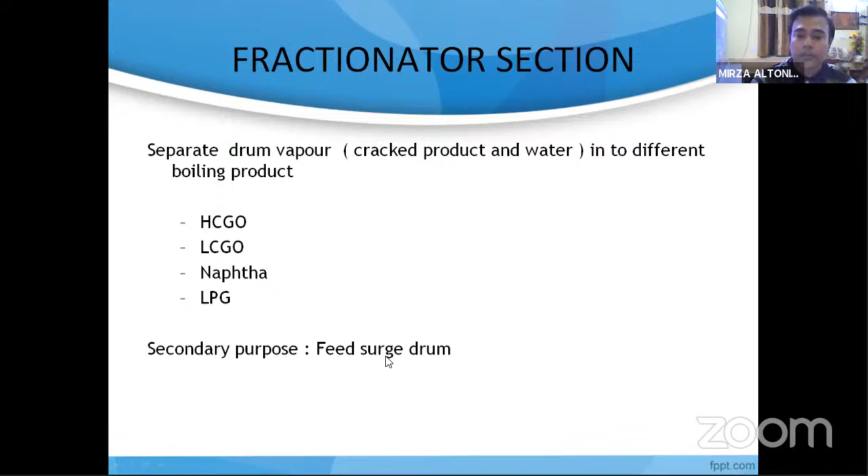From the fractionator section, we are getting HCGO, LCGO, naphtha, and LPG. The heater section provides heat to the feed, the VR (vacuum residue), for thermal cracking. In the coke drum, the entire reaction takes place where polymerization occurs and coke is formed. In the blowdown section, as I said, it is basically an environmental norm requirement where we control emissions and recover the hydrocarbon vapor from the cooling and heating cycle of the offline drum.

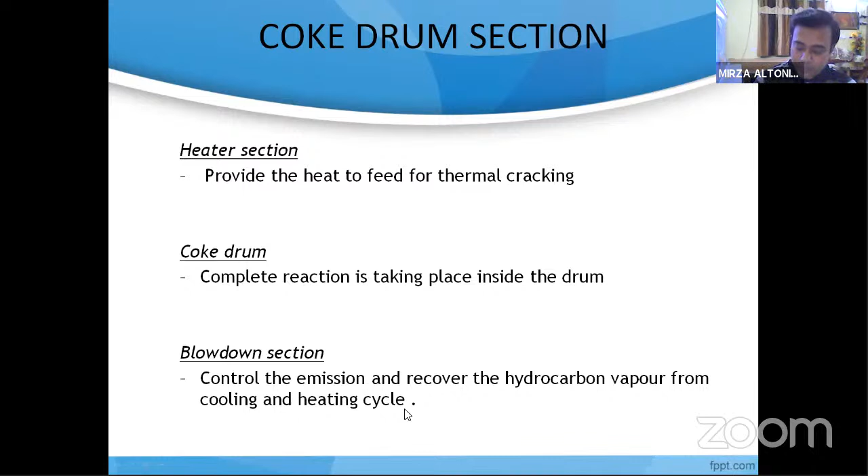In the gas con section, from the lighter feeds coming from the main fractionator, we are stripping off the lighters from the heavy cut - C3, C4, C5 cut. We are getting the lighters, FG. In the absorber, it basically acts as a trap to get the LPG, and naphtha is used as a lean oil, as an absorbent in this column.

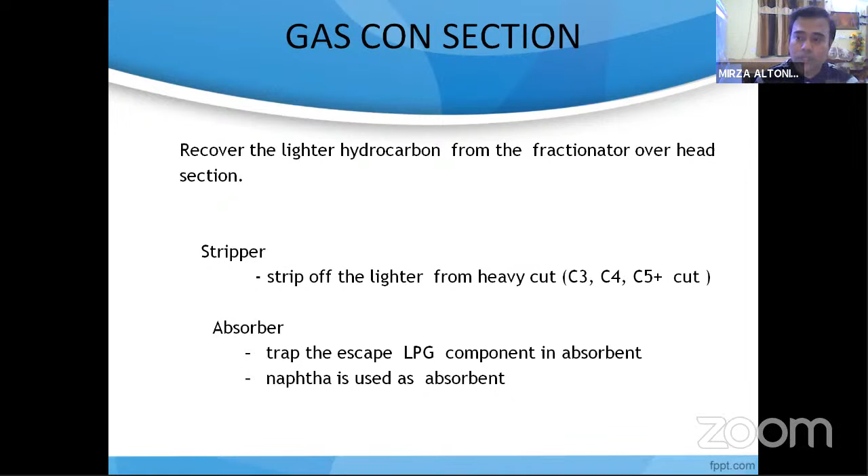We have the sponge absorber, which is basically to recover the carried away C3, C4. And we have the FG amine scrubber, where the fuel gas coming in contact with lean amine has the H2S removed, and the fuel gas devoid of H2S is sent to the fuel gas header.

The debutanizer - here we are stripping out the LPG. We are getting the LPG from the heavy part, and this LPG is sent to the Merox unit for further treatment. Light and heavy naphtha are separated in the naphtha splitter section. This is the last column, the last section in our DCU, the naphtha splitter section, where by steam stripping we are getting the light and heavy naphtha.

The LPG amine contactor, as I said, performs the sweetening of the LPG. Amine is used as an absorbent and removes the H2S from the LPG. Further H2S removal is done when this LPG coming out of the amine contactor is sent to the Merox unit, where further H2S is removed and mercaptans are also removed in that section.

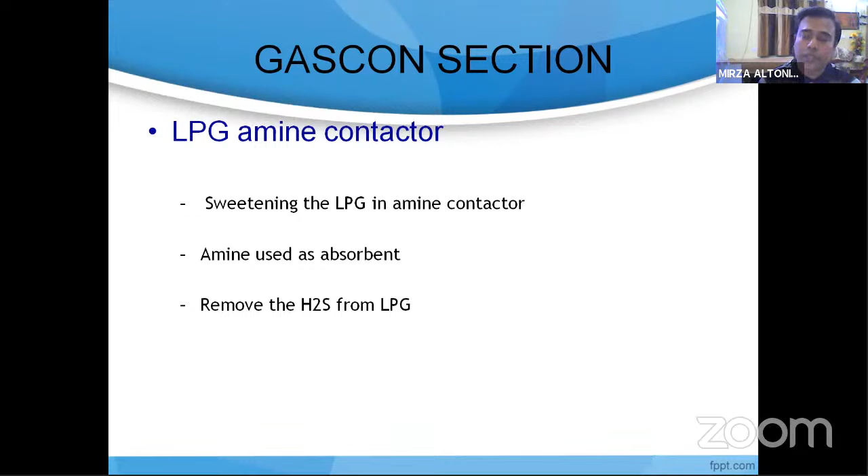As Mr. Pradeep Sen Sharma ji earlier said regarding the HAZOP and SIL study, this area is now totally driven by interlocks, PLC driven interlocks, which are quite safe and do not allow any misoperation. The system is configured in such a way that the interlock will prevent any unsafe condition.

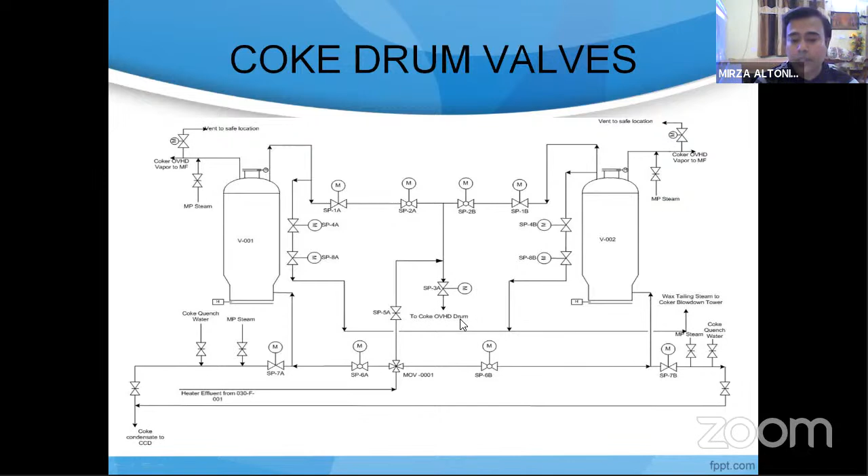So from these drums, the inline drum, the vapors go through SP1A, SP2A, and then go back - actually this is wrong, this should be main fractionator. It goes to the main fractionator. Now let us go to the next slide.

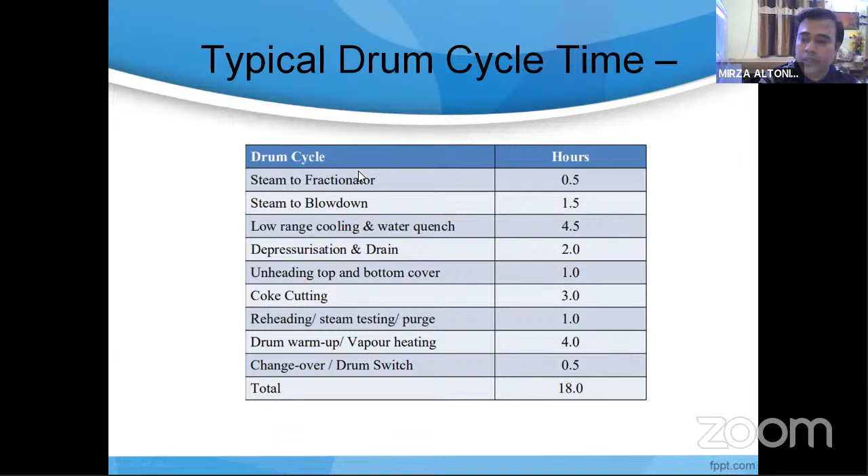Now our byproduct is coke. What type of coke do we produce? Generally there are three types of coke that DCU produces: sponge coke, shot coke, and needle coke. Needle coke is the premium coke, one of the best quality cokes.

But to produce needle coke we have to meet certain parameters, like higher drum pressure and low sulfur. Generally in refineries it is tough to make needle coke simply because the initial designing of the delayed coker is based on sponge or shot coke. So generally we produce shot coke or sponge coke. For needle coke we need a specialized drum capable of handling higher pressures, and very stringent feed parameters.

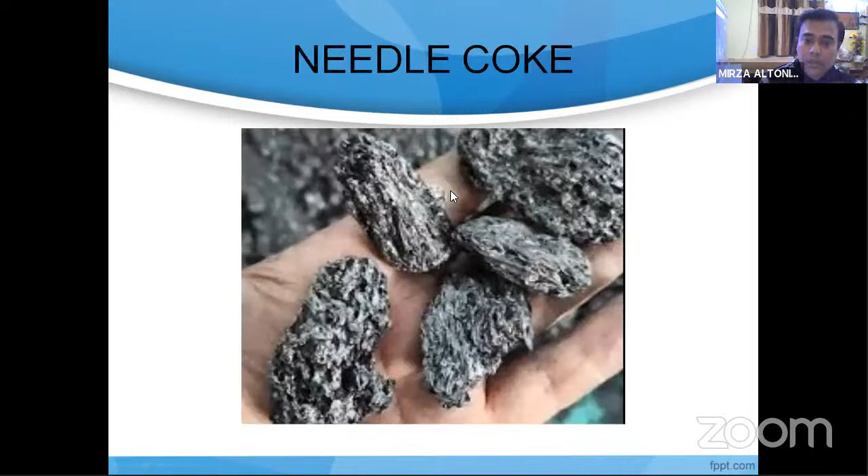There are high fire prone zones in the unit. The coke drum top, as I said earlier, is a very high fire prone zone, simply because any incorrect operation or leakages may lead to a huge fire.

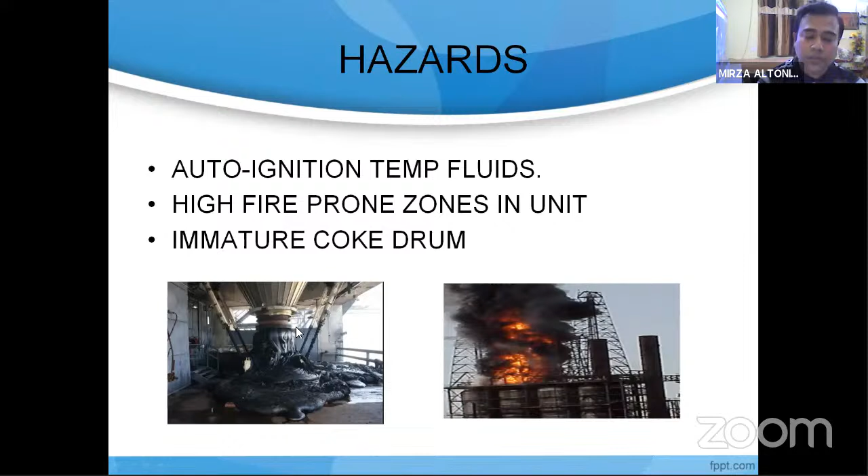So this was basically a brief overview of DCU. There are a lot many things to say, but I guess I've been able to give a brief description of the unit and the important equipments. So if you have any questions or queries.

Shamiji, have they been to any? Yeah. Can I ask one thing, Mr. Mirza - when delayed coker unit was not there at Haldia till 2018, you said. So how that part was addressed? I mean, what was the loss, both technically as well as financially?

Actually, we were losing out on the middle distillates. One of the purposes of having DCU here is that we needed to improve our distillate yield in the refinery. Once DCU came, our distillate yield improved because we were able to process all the heavy materials and extract the lighter components from those heavy materials, which were earlier going into making bitumen. Before this, whatever VR we had was going into the making of bitumen, and that bitumen was being sold at a lower price. Now we are able to extract the lighter components from this vacuum residue, and we are getting LPG, we are getting diesel. So these are all profitable components.